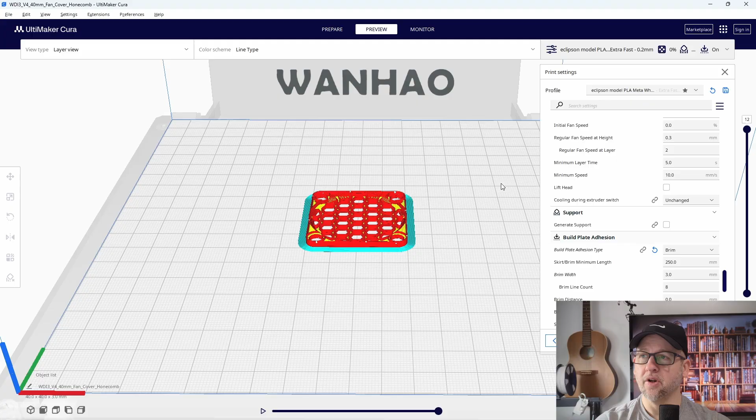So what I'm going to do is I'm going to take an STL of this file, and I will remix it. Remix means I'm going to change it and modify it to make it my own. So first of all, I'm going to import this into my software. So if you can see my screen now, this is the original. This is sliced, and it's showing you what it looks like right now. And perhaps I get like top layers off or something like that. But okay, so that's essentially it. So I'm going to remake this and make this better.

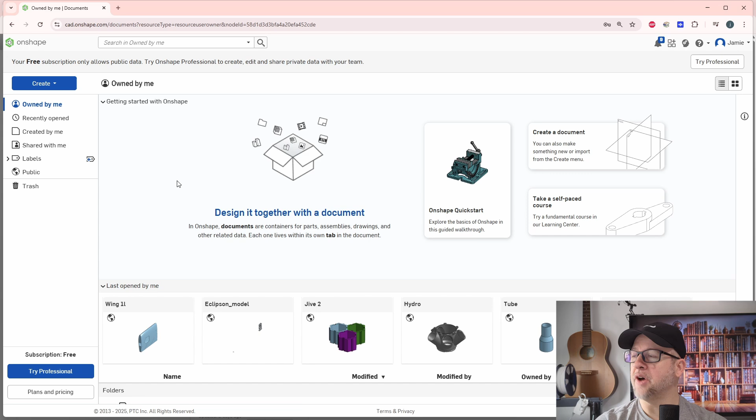Okay. So let's open up Onshape. All right, here we are. We're on Onshape. This is the free subscription, and all this data is available to you if you go search for this document. Okay, so I will go create document, and I will call this fan protector.

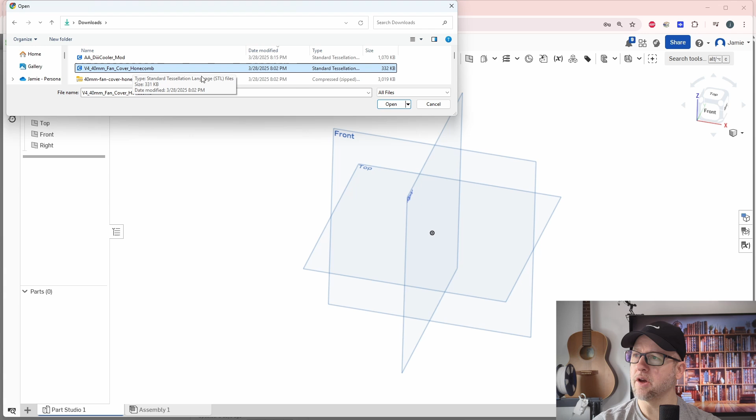All right, so I will do an import of this guy. So let me go down here to the little plus sign. I'm going to click on import. Okay, that's the one I want. I want the 40mm fan cover honeycomb. We're going to open that up. We're going to import that in millimeters. Yep. All right, now we go down here. Should have imported into there. Now we see the file.

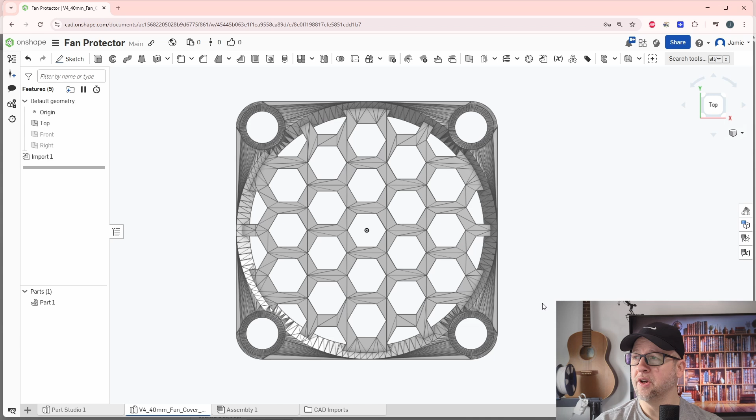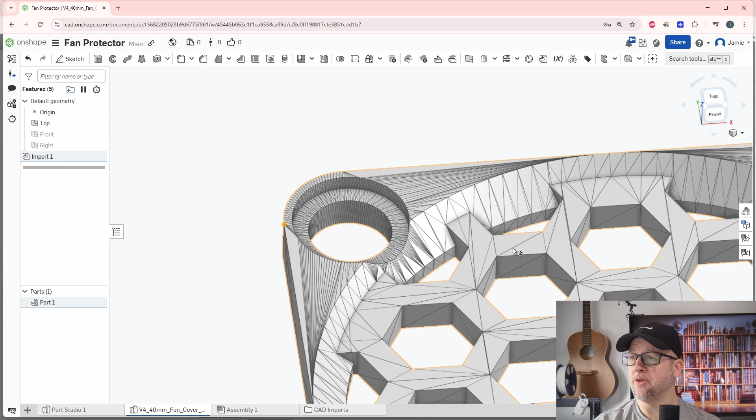Okay, so now I want to change this quite a bit. And so the diameter of that, I definitely want to make that bigger. And I want to thin this guy out, okay? So basically, I'm going to change the size of this. So I'm going to sketch onto the top plane, sketch, click on top, and now we're already in sketch. So now I can choose my rectangle here, and I'm just going to choose it like this, and then I'm going to try to do a dimension to the left and right side, okay?

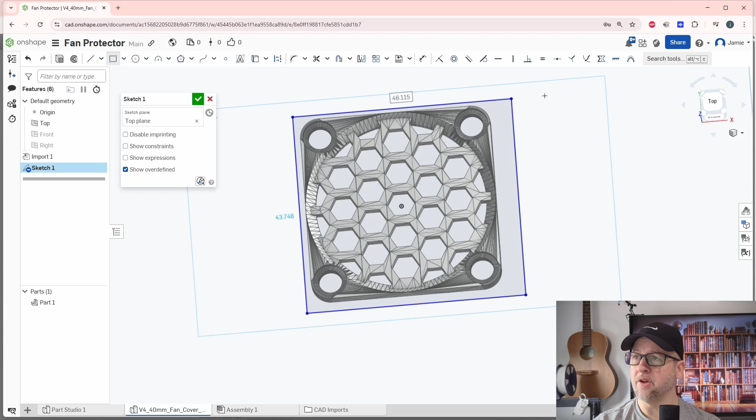So dimension from one of these points, this point here to this point. We're going to call that 0, and here to here is 0, okay? So then we could just modify this to this. We know that's 40, and we know the top to this is 40, okay? So I don't know the bolt location. I could measure my existing one with my calipers, okay?

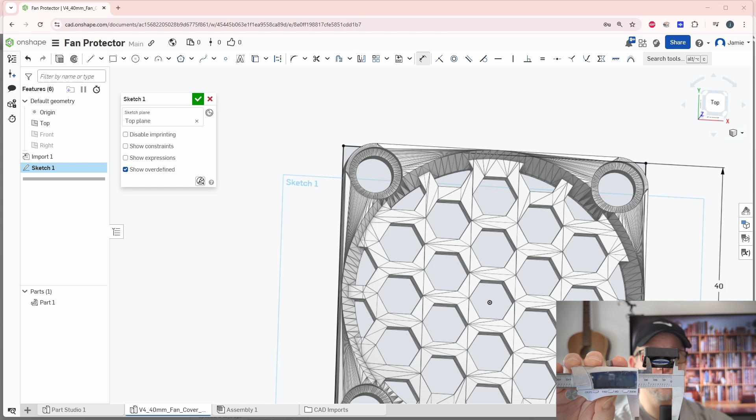To get the distance between the two, I would take my calipers here, and I would find the overall distance, okay? So we got 35.4. Okay, 35.4. And that's hole to hole. Let me see if I can show this. All right, it's going to be backwards, unfortunately, but that's 35.4. It's going to the outside.

So now to get that back into center, I will take that. Okay, I'm going to call it 35.5. And then I'm going to check one diameter. Okay, so I'm going to do 35.5 minus this number right here, this 3.5, okay? So equals 32, okay? Actually, I'll drop a couple points in here, okay?

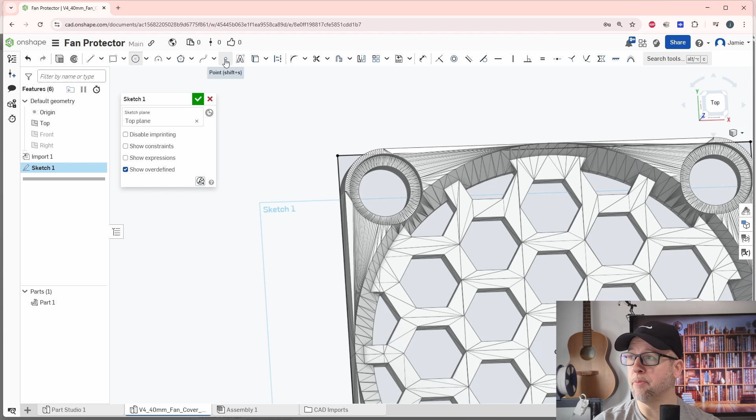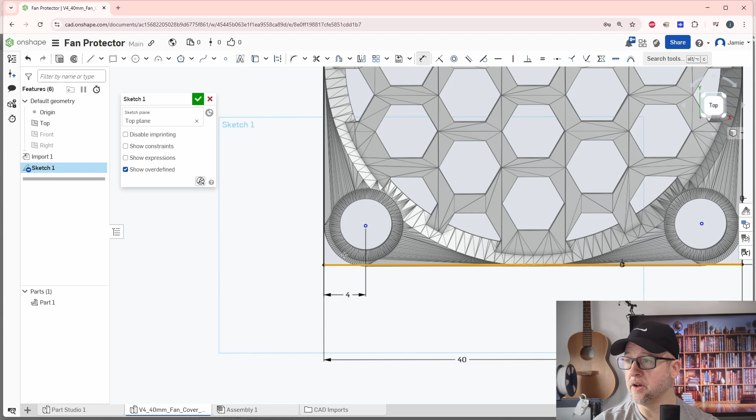And I'm just gonna pick a point there, pick a point here, and then we can do some modifications to this afterwards. We can do a counter bore. So what we can do now is we can distance these. So I want to distance them from here to here, and we're gonna call that, I think it's 4. Double click on that, 4, okay, I think that's right. 4 from here, and then we'll go 4 to here.

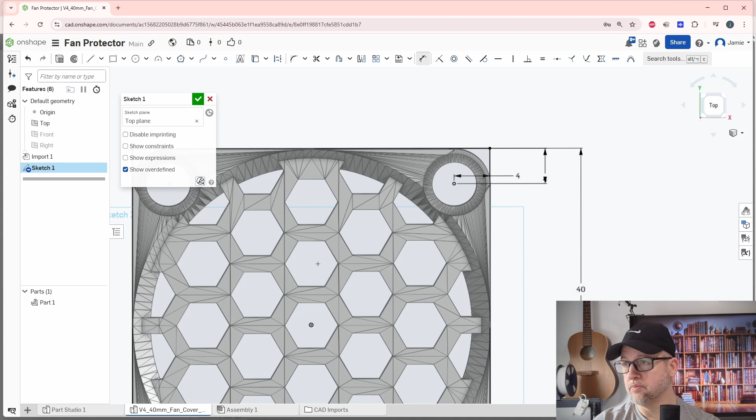And we can do this same level as that, or we could just dimension it, whatever you want to do. I'm going to do it like that. And then 4. Not that one. Hit escape to get out of that. Go back into D. 4 and last one 4. Okay. So now we have those positioned properly.

Let's double check and see how far they really are. They are 32. I'm going to take the minimum this time. So the minimum diameter here is 28.5. So we're going to do 28.5. And then we're going to do that 3.25, which is the minimum. Okay. So that's there to there. 28.5. And then we're going to do the whole size, 3.5. So 28.5, and then this time we're going to do plus 3.5 and it equals 32.

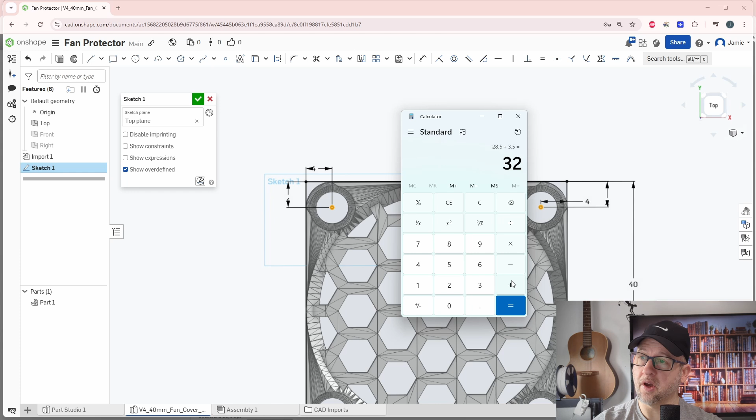All right. So that's it exactly. So this number matches up this number and we are good to go. That's from measuring the minimum of the two holes and then adding one entire hole. So it then does the center of one hole to the center of the other hole. Okay. There we are.

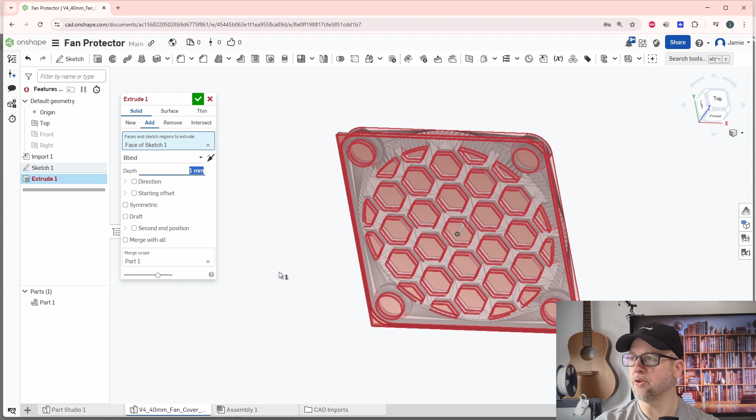We want to do sketch 1, which is extrude this guy right here. So we want to extrude it. Let's go 1 millimeter. We're going to see how that looks. And we're going to go new. And I'm going to do it, let's say 1.5. I want to keep this thin. Or what I'll need to do is I'll have like a counter bore. Maybe I can make it a little bit deeper. So 2 millimeters, okay? 2 millimeters. And we're going to counter bore it and then allow it to recess into there.

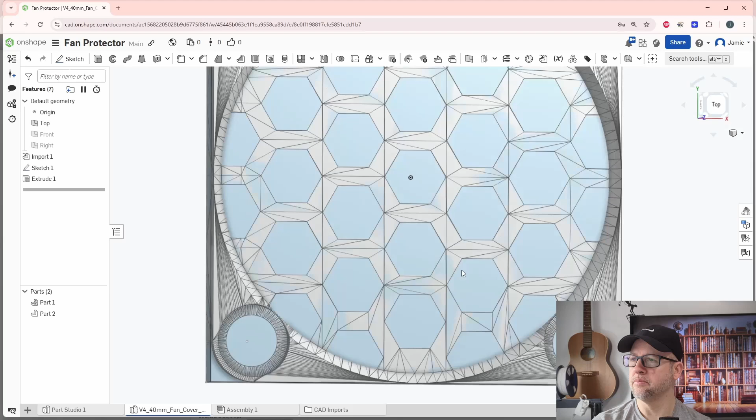And now we're going to start with the center. Okay, top. We're going to create a hexagon, a polygon here. So we're going to sketch onto this blue face right here. Okay, and go back into that sketch. And then I want to create my inscribed polygon. Go to my top view, zoom in, polygon, click on that center guy, and I'm just going to create a little off, and I'm going to do 6-sided.

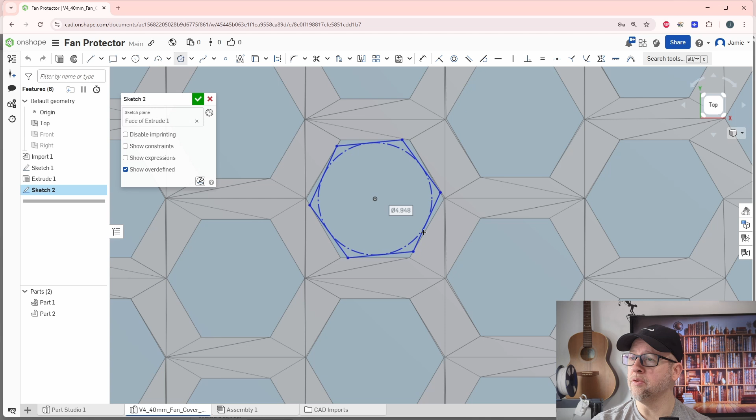So go inboard into it, and then I want to change the size, do a D, and then 6 millimeters. Actually, it's 5, I guess. 5. Okay, there we go. And then we want to make this bottom edge flat. So horizontal, that horizontal. See it snapped there. There we go. All right, so now we can finish this sketch.

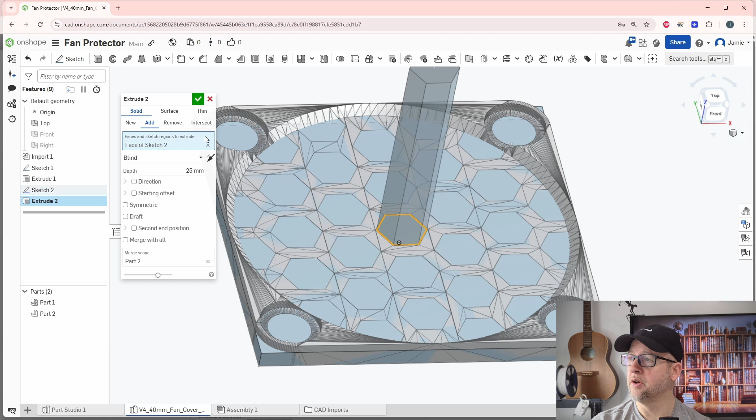And we want to extrude that. Extrude this guy right here. We want to go symmetric, and we want to go like 10 millimeters. So we're just creating a new piece, not adding or subtracting yet. All right, and now we will start to do our circular array. Just a normal transform. We're going to take this entity and translate it straight up, X, Y, Z, and we're going in the positive Y direction. So we're going to go 7 millimeters.

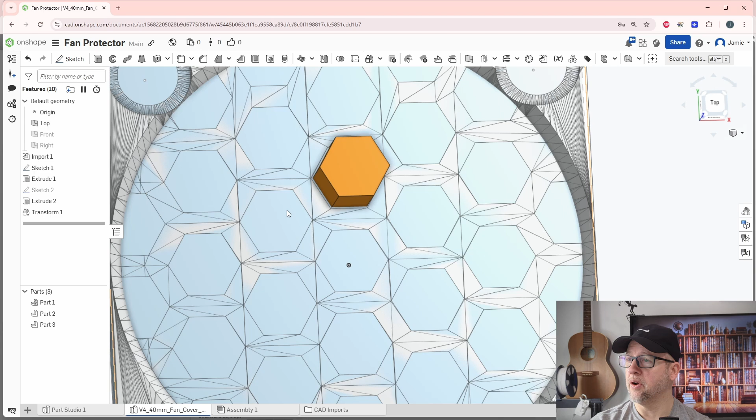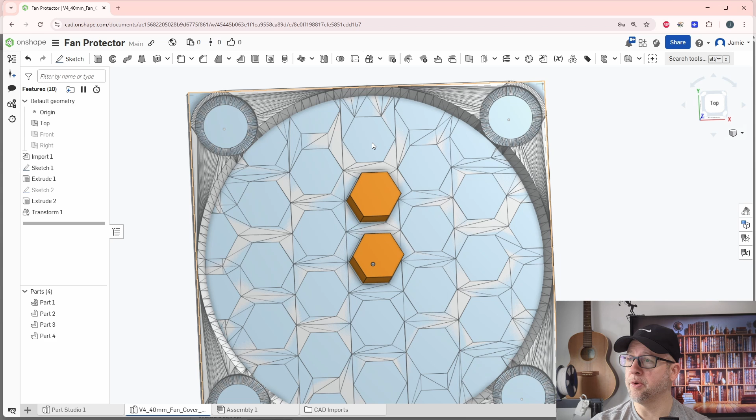There we go. So now it didn't copy because I didn't choose to copy part. So just got to double click that, get back into copy part. All right, so now I want to rotate this guy, but I could actually create another one. So let's transform another. We could actually do a couple. So if I move one up here, it's going to do all these. If I move one all the way, okay.

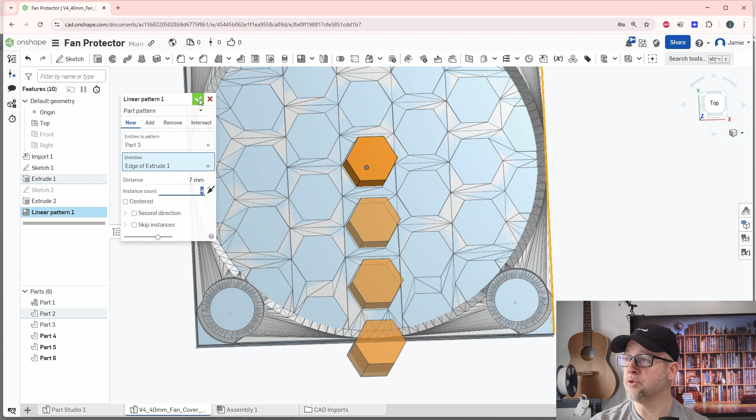So we're going to do instance array. We're going to take this guy and do an instance array 1, 2, 3 times. Okay. And so now I will go to linear pattern. We're going to click this guy and we're going to go in the direction of this here. So our positive Y. We're going to do 7 millimeters, and then we're going to do 4, I think. 4, yep, 4 will take us outside, which is good. And now we can say okay. All right, so I'm going to go into circular pattern, and I'm going to do a new.

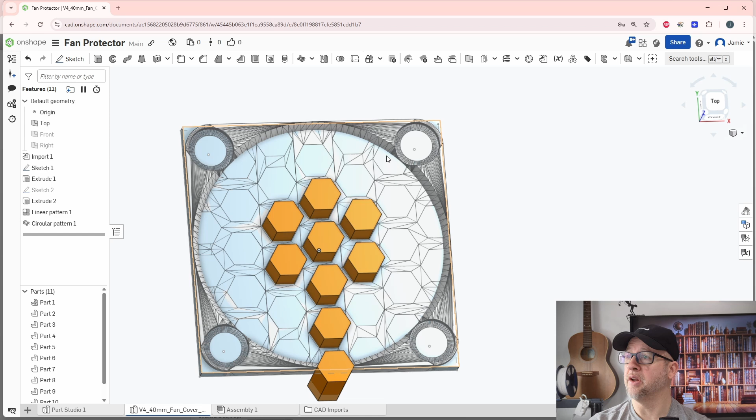I'm choosing this guy only, and I'm going to do axis to rotate about. To click that guy, click this here, and we're going to do 6. There we are. So 6 was it, okay. So we got those 6 now, and now we want to do another instance, and we want to choose entities.

The entities are going to be this guy, and axis is going to be this guy again. Okay, and we want to do, I think, 12 this time. Yep. All right, so now I'm going to move a couple of these inboard. Or I can just take this and I can rotate that one.

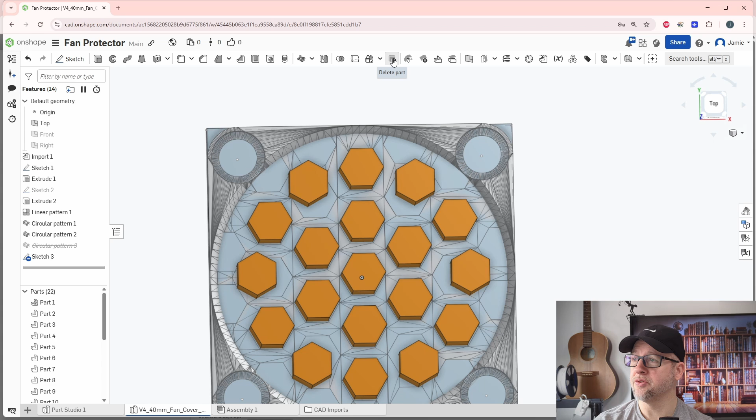So I'm going to delete these guys that look like they're the oddball out ones. So delete this guy and this guy. Actually, this guy and this guy. They're not falling on the same area. This guy too. Delete that. Ooh, don't hit delete because it gets rid of the entire instance. So just click delete part. There we go.

So now I think I actually did one. Let me Control Z. Let's not get rid of that guy. Let's go back to delete. We're gonna click this guy, any of them that are oddballs that are not lining up. Getting rid of those. Okay. So now we want to create one right here, in those 4 quadrants right there. So let's move one right here.

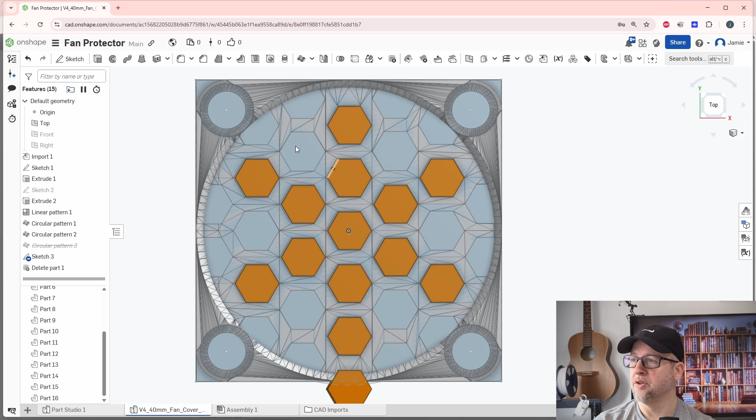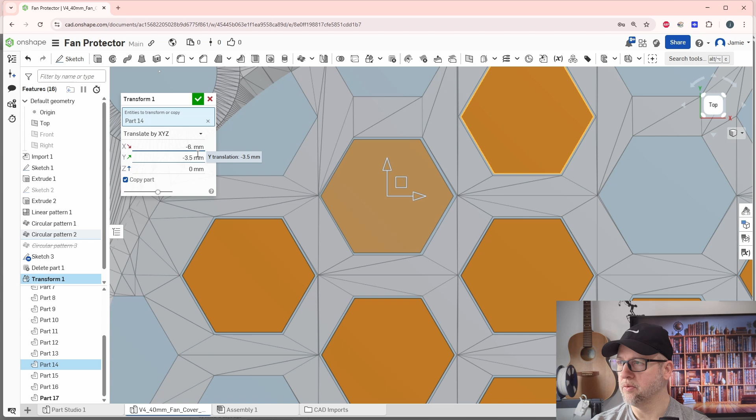So we're gonna take this guy and do a transform of him. Okay, -6. Let's do -3.5. Okay, and looks like it's slightly off. All of them are actually a little bit off. That's not a problem though. 0.5. All right, I'm going to call that good. So now we're going to do an instance of that guy. 1, 2, 3, 4, 5 times.

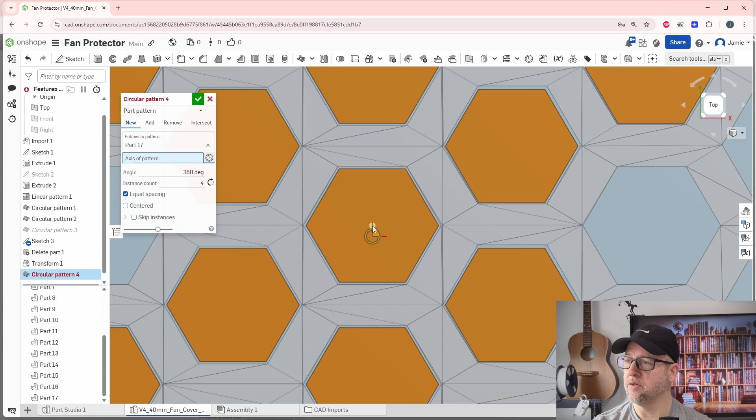Okay, circular pattern. New. We're going to choose this guy. Axis. Top. Again, we're going to redo that. Don't know what it's doing there. I want to choose, yep, top. Perfect. And now, let me get back in my top view. And now I want to do it 6 times, I think I said. Yep, there we go. 6 times.

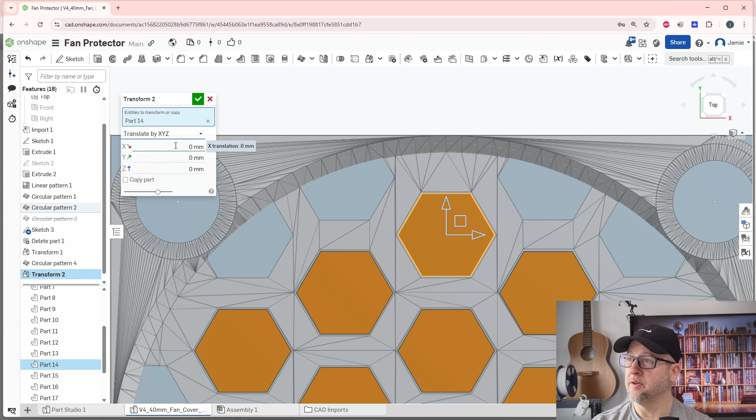All right, so now we want to create the last set of them. So we're going to move this guy about the same as that transform before. So it was 6.05 and 3.5. Let's do a transform of this last guy. Probably have to do this a couple times. I'm going to take this guy right here. We're going to do X and Y. So we're going to do -6.05. And then I think we said 3.5.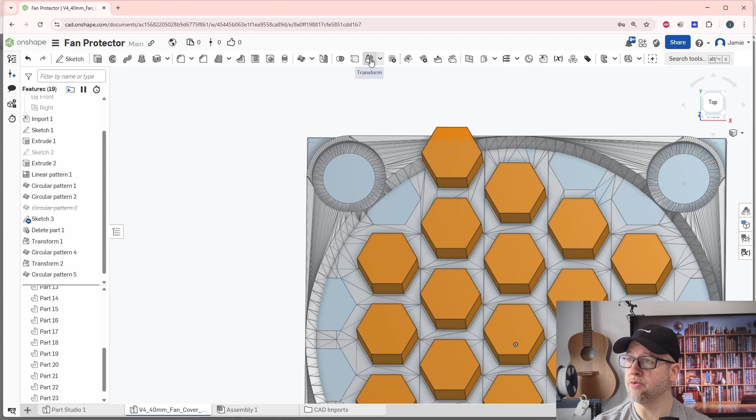Yep, perfect. All right, so we moved it. So we just got to go back to transform. Copy part, no problem. All right, so now we're going to move this guy down and do the same thing with transform. Okay. There we are, copy part. We can do instance of that. And we might as well do an instance of this guy too.

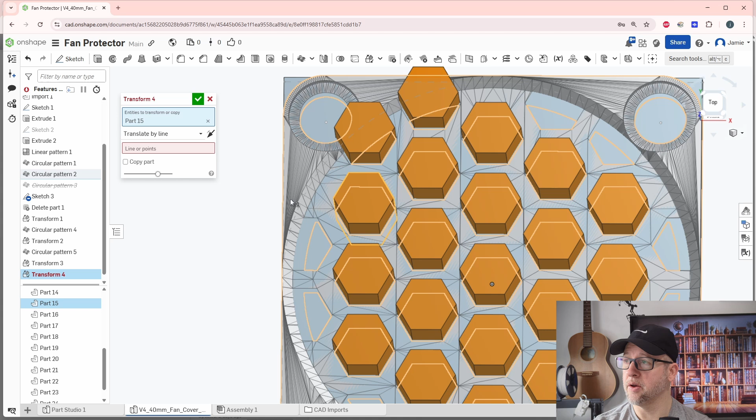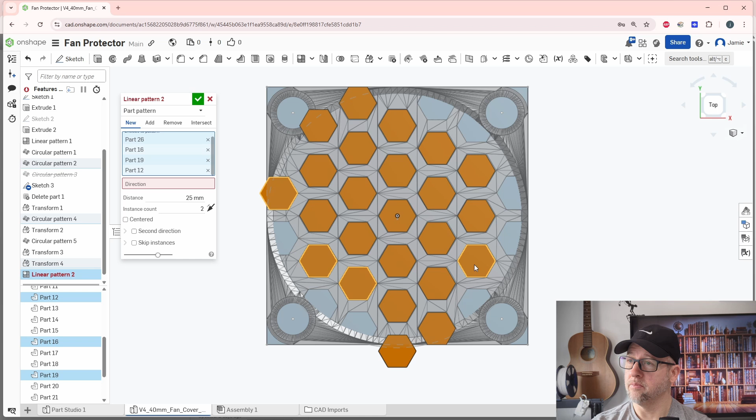So let's move this guy over. Transform this guy. XYZ. Copy. We're just going to take these and move them down. So here we're going to do a transform. Or we could do a linear pattern. Whichever one we want. So we're going to choose this guy, this guy, this guy. We're going to move these guys down.

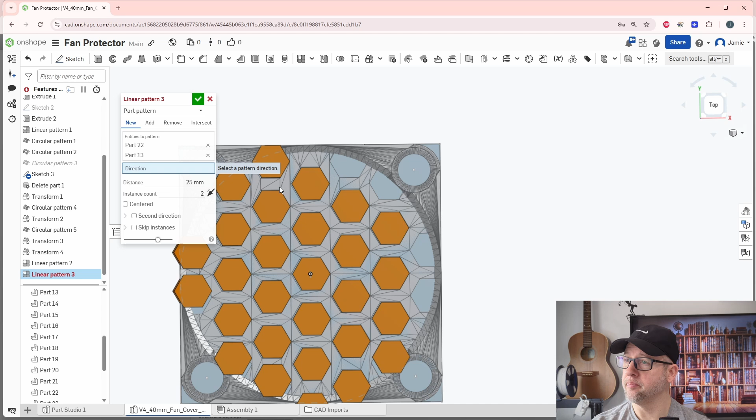Direction. One of them, one place, and 6. That was it. We already had 1, 2. All right. Now we'll choose the other guys. Linear pattern. Here, here. It's just going to go up. Oh, flip it. That was it. So we got 6. And we got 2 instances. And now we're going to move this guy down, and do 1 instance of that guy.

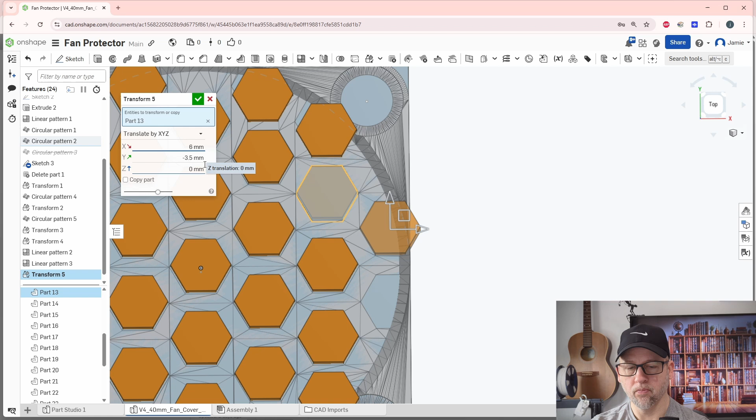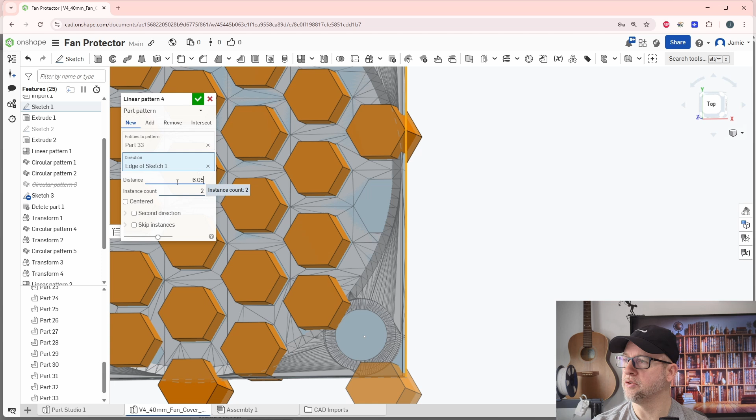So transform this guy. Copy part. And then we're going to do instance of that guy down. Choosing the edge right there. 6 millimeters, or we can do 6.05 if we want to be exact. Instance 2 of them. There it is. All right, so there we go.

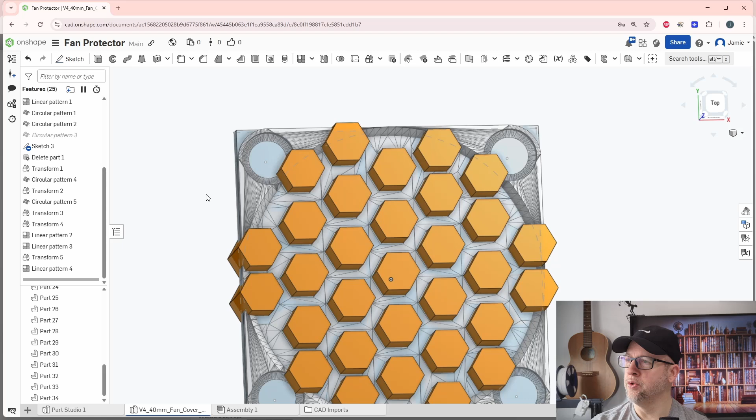Now we need to chop these parts that are outside of it, chop them out. Okay, so now we're going to create that circle. We're going to use that circle to do our splits. I will do an extrude. We got new solid. Let's choose that and this and this.

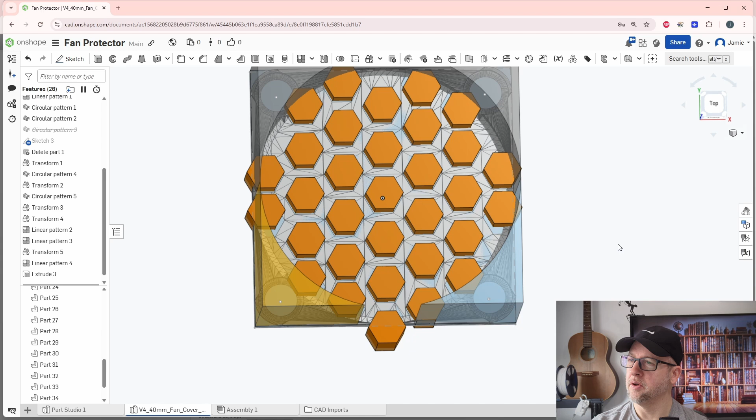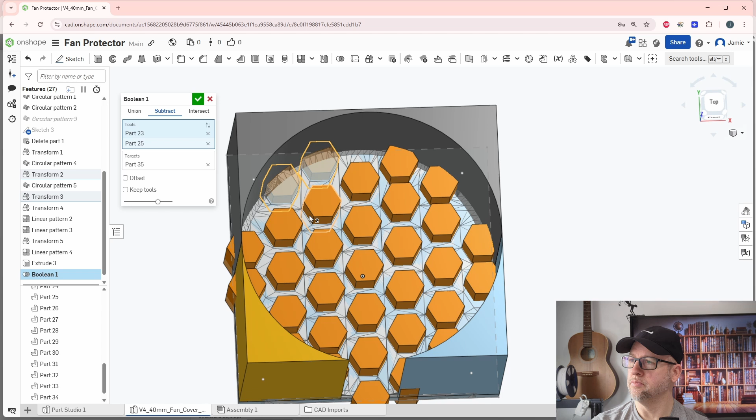So now anything touching those, I will subtract. All right, let's go to a Boolean feature. Subtract. Target. I'm going to keep this as our target. This is our tool. Let's see if we can do multiples. I think I did opposite. Target is this one, this one. This is our tool. Yep, okay, so that's working.

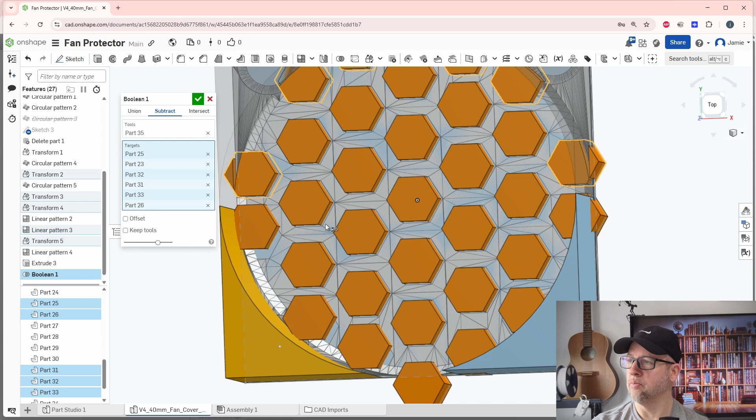So we're going to keep clicking on targets. Notice this one jumps onto another area, so we'll leave that one out. Okay, it's starting to subtract all those. Got it. Now we got to go to the other ones. So should have split that. Yeah, it did. Okay, we can delete that body afterwards. So now we're going to subtract out these guys.

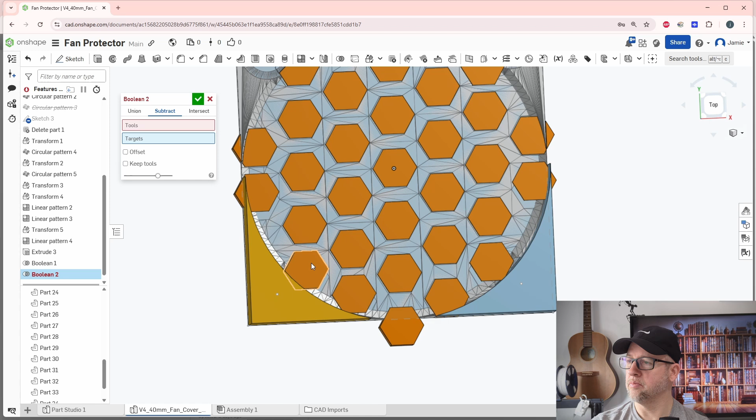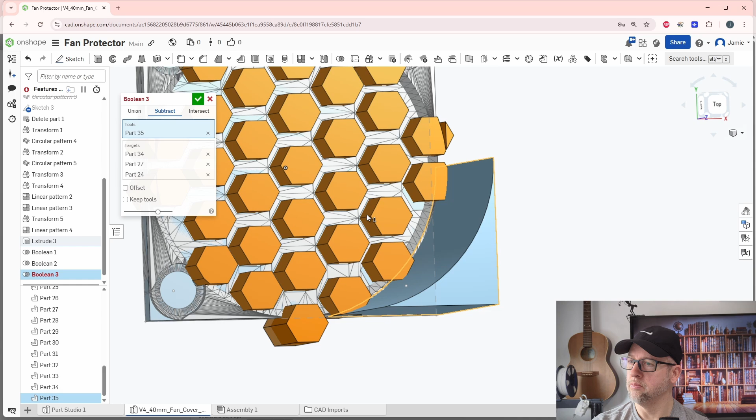So now we go back to the same thing. Subtract. Target. Tool. Okay. Same thing here. Subtract. Targets. Tool. There we are. I trimmed it.

You know what we should do is change that circle size. Let's go back into that sketch. We're going to change that to, let's say, 39. Let's take a look and see what size 39 looks like. We want it to be inboard. Alright, it's kind of oddball dimension. Oh, it wasn't even centered. That was another problem. Let's try 38. That was the problem. Okay, now we go back.

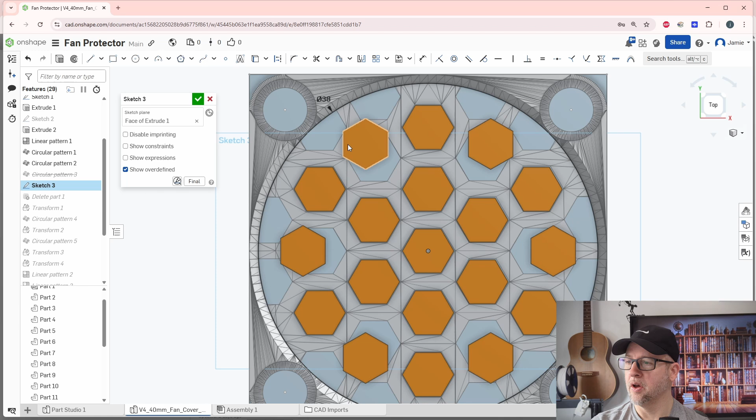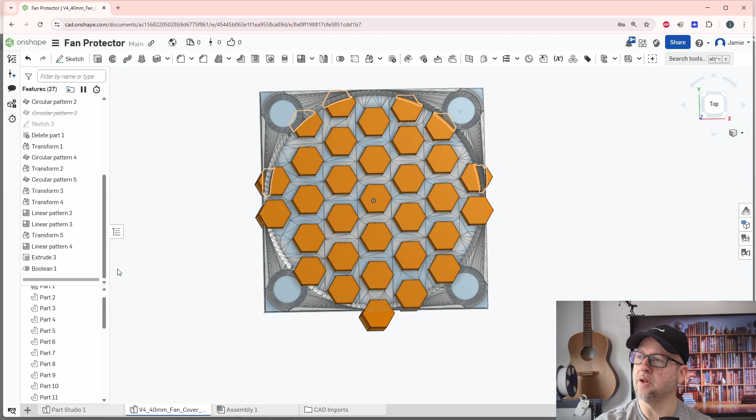And now I'll go back to my subtractions, my booleans. Kind of broke them. So let's walk through this a little bit. Extrude. Look at that. Okay, that's much better. Now we're going to click on that boolean, delete that boolean, and we're going to subtract out these guys from that extruded shape. So we got the extruded shape there, boolean, and we got the part, we just need to choose the rest of the pieces to cut them out.

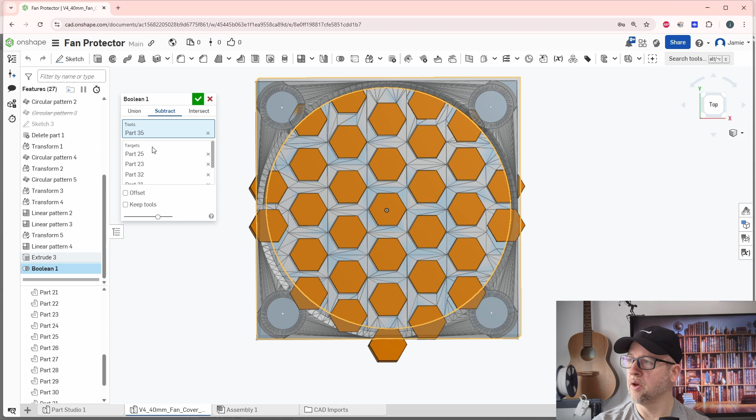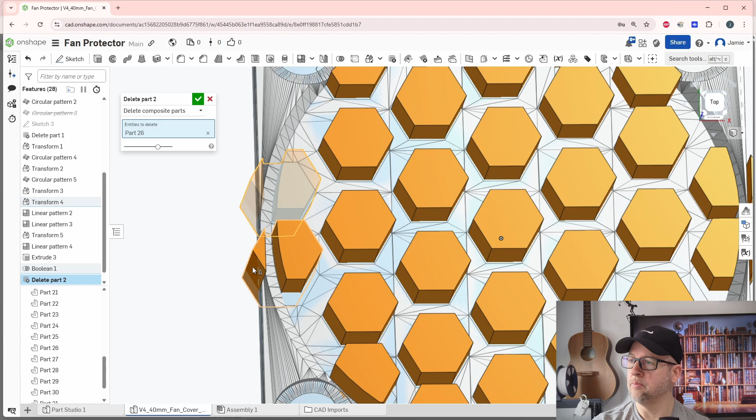That one, undo that guy. I'm going to do that again, boolean, part, and then target is this guy and this guy, this guy, this guy. Looks like they're all chosen. There we go. Now we can go to delete. Delete these, not face, delete body, part. I don't want to delete the entire part. Why isn't that? Oh, you know what? It's not entirely separated. That's why. But that should be okay. That's no problem. We will subtract that out of the blue piece.

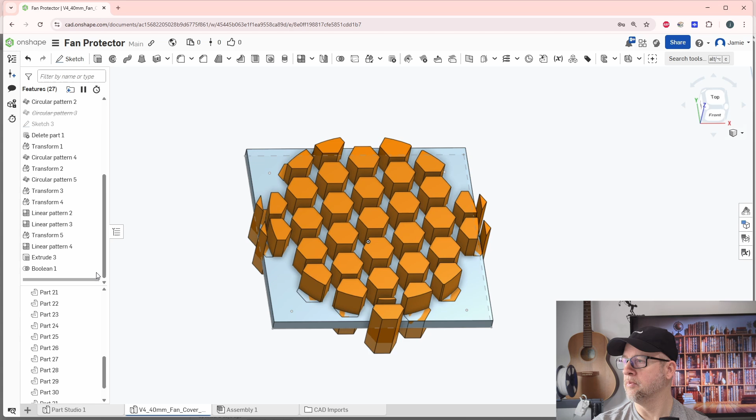All right, let's go hide my STL, which is my import. I'm gonna right click, suppress that guy. I'm gonna check out that extrusion. That extrusion, I want to go farther down, so I actually want to do a symmetric. There we go. Now it's going to remove all the extra pieces. And now these should be separated. There we are. Okay, go to the delete part. Click there on the parts that I don't want anymore.

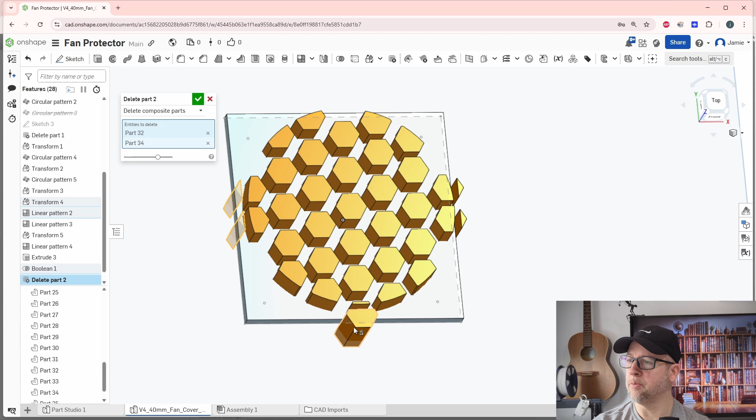Okay, and now I can do a subtraction. Boolean, subtract, target, this guy. Tools are these guys. Actually, I have to choose each one of these individually. There we go. Okay. And now we see we got our piece. So now we just got to put in our counterbores.

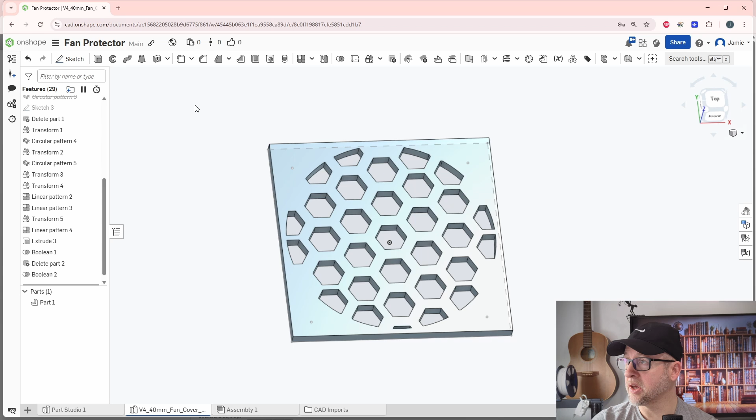So our bolt, let me measure this. The bolt head of this guy is, let me turn the calipers on. Okay, bolt head is 5.5 millimeters. And so I'm going to make that 6 millimeters counterbore. So now we're going to place the counterbores on here. Since the holes originated from this side right here, we're going to go to our hole, counterbore, choose our 4 holes, 1, 2, 3, 4, and then we will merge with part 1. They're going to be drilled and they're going to be counterbored.

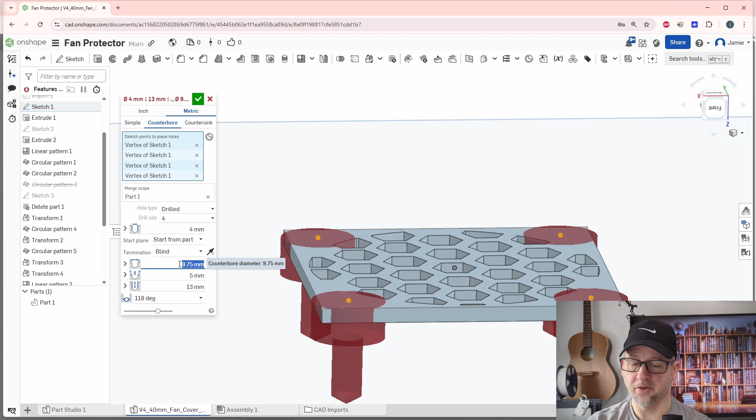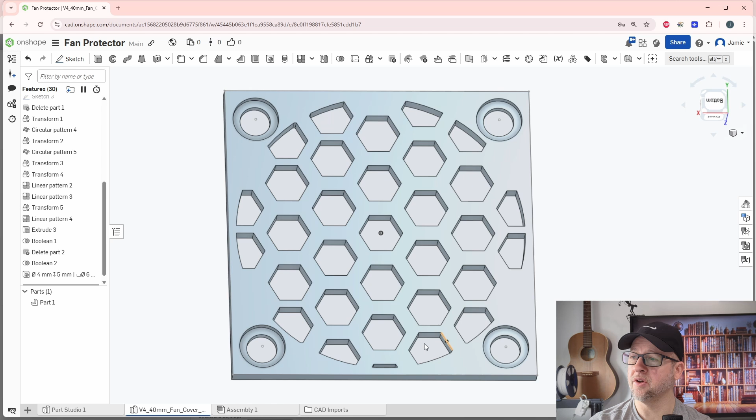So this was 6 millimeters. Counterbore depth is 1 millimeter, and total depth can be whatever you want. Let's say 5. That will take it through. Okay, and that should create a simple fan shroud that I could put around my fan. So I'm gonna print this out, see how it looks. This was a little more complicated than I thought originally. The reason is things didn't match up properly. All right, so that's the fan shroud, and hopefully this was beneficial and you learned something from this video.